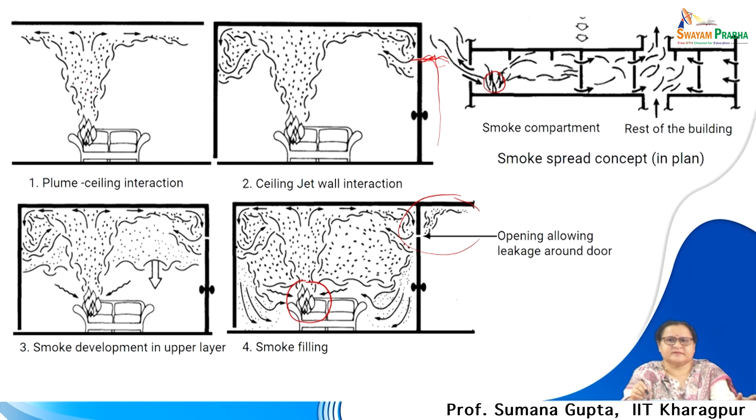So, till the door is closed, the leakage will be there, but gradually if there is an opening, it will come out. So, in this picture you can see the leakage has happened and gradually the smoke is coming out of the room or the enclosure where the fire has happened, though the fire is remaining there. Now, let us see some plans.

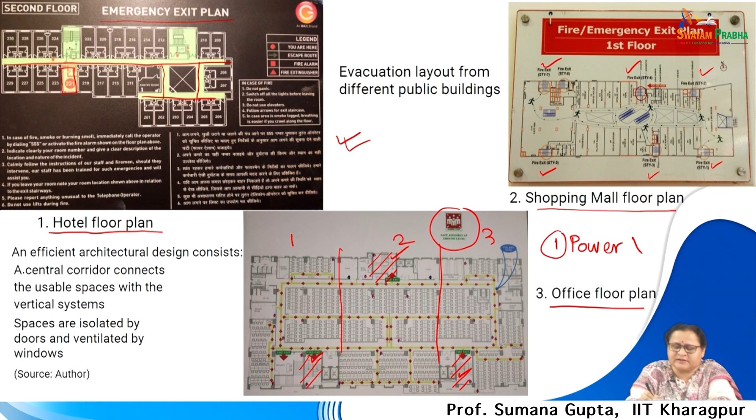So, again comes the point, if these common areas, the passages or the corridors through which the people will be rushing out, are full of smoke, people cannot carry out their movement. Remember the 2 points. In case of fire, the power is switched off, and with smoke visibility reduces, that is called obscuration.

So, we need to manage the smoke because it lacks visibility. Because of smoke the visibility is lost; because of smoke and fire all electrical points are extinguished. So, it is only the emergency lights giving you a direction, and the smoke can even lead to lesser visibility and you may not be able to see.

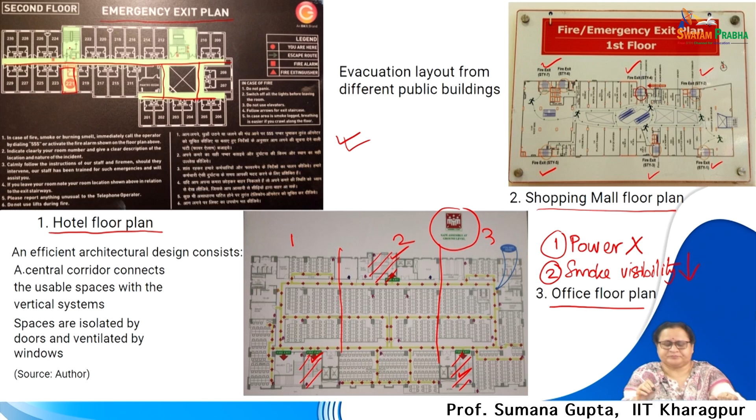So, that is why all the corridors which I have shown in the previous slide have to be kept smoke free. All the staircases which are marked as fire staircases have to be smoke free. How to do that? Now, let us look into a few more points before we move to the management of the smoke part. Obscuration, which is lack of visibility, and it is told that with distance it is actually exponentially reducing, that means at a logarithmic scale it is reducing.

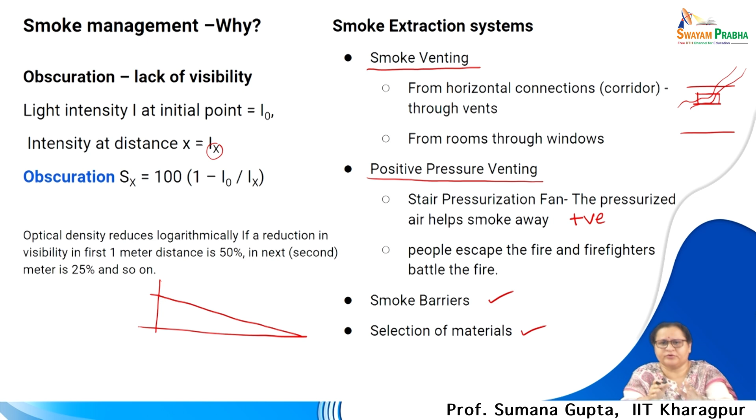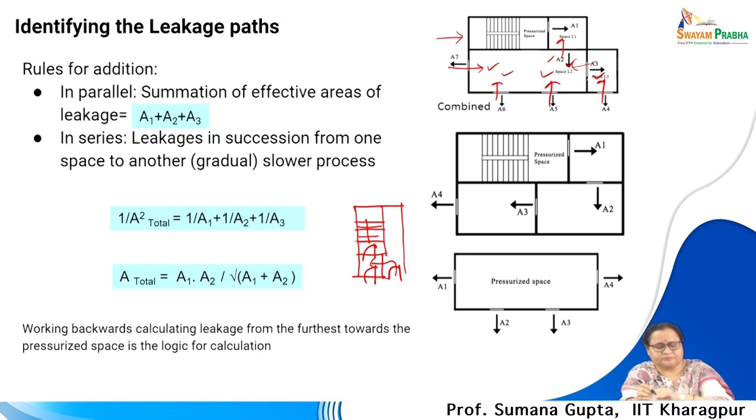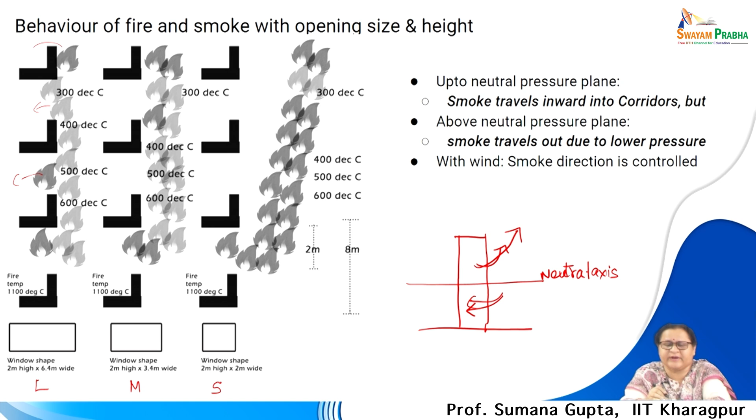So, this is the neutral axis. So, there are heights, the neutral axis, beyond which the pressure outside is lower. As you know, the higher you go, the pressure reduces. So, inside the building there is a different pressure than the outside. Outside is low pressure, so inside air or smoke will go out. Below the neutral axis, the air pressure outside is almost equal, and with the wind direction it will try to get in. So, wind direction controls below the neutral axis; above the neutral axis it is the smoke going outside the building. These kinds of phenomena are very important in case of high rise structures, and the behavior or taming of the smoke as well as the fire becomes important when the fire is at higher floor levels.

We gradually come to the concept of pressurization. Those were the opening sizes, height variation, movement of the smoke direction, but now we want to tame the smoke, control the smoke, contain the smoke in some area and not pollute the passages which are meant for escape. Pressurization is the process which was developed in the 1960s, and gradually it came into buildings, particularly high rise stair enclosures. It is a popular option for protecting the staircases, because the staircase is the only path which remains active for the movement of people. It is not a very difficult thing, but the system has to be operational whenever there is a fire. So, whenever there is a fire, suspecting that the smoke will gradually come out into the building parts, the pressurization system has to be initiated. That is the only part.

Now, it prevents smoke leakage through closed doors into the staircase by injecting clean air into the stair enclosure, so that the pressure in the stair lobby is greater than the adjacent fire compartment. So, a flow of air is continuously maintained to oppose the smoke entering into the staircase or the corridor. Occupants who are most at risk, that is at the fire floor, are evacuated first. Then it is phased from where the fire has happened. The top people are rescued first, and people at the lower levels come out gradually. The lobbies and the fire lift courts also should be pressurized to limit the smoke spread and ensure that the lift is available at all times. If it is a high rise or tall building, as I told, there is a mandate for the fire lift already. So, these lobbies and fire lifts should all be

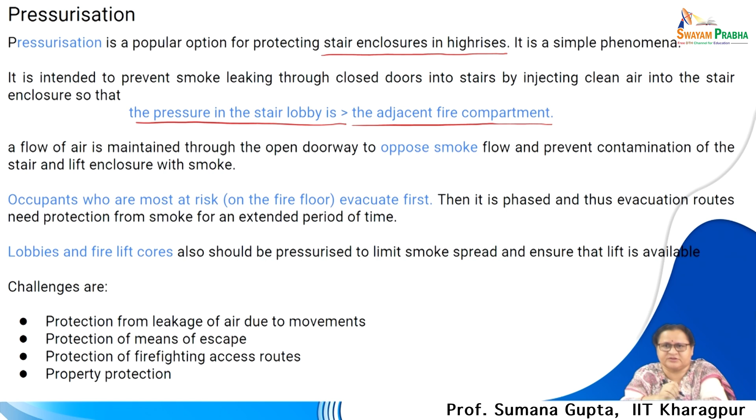under pressurization. The challenges are protection from leakage of air due to movements, because whenever people are coming out of the building or taking the staircase, they are always opening the doors, A1, A2 or A3, the openings which we discussed two slides before. So, the protection from leakage has to be ensured. Protection of means of escape is to be ensured. Protection of firefighting access routes is to be ensured. Property protection is to be ensured by the process of pressurization. We will try to see this in a representative drawing; I will show you in some time.

So, this becomes a standard feature of high rise building codes. Pressurization has to be there, and there are two kinds of pressurization. One is when the system starts when there is a fire alarm. The other is you continuously provide a positive pressure in the corridors and in the stairwells which are marked as fire staircases.

But yes, there is a loss of energy continuously if it is kept on positive pressure. You have to continuously have a fan to maintain that pressure inside that entire staircase shaft. So, that brings in cost efficiency of a building, but pressurization usually starts when there is a fire alarm, and the pressurization happens. So, that is a one stage pressurization, that in case of fire the switch is operated,

but in 2 stage pressurization there is always a very low positive pressure. With the alarm set, it further increases by additional power. The building enclosures, the fire enclosures and the corridor enclosures are further protected.

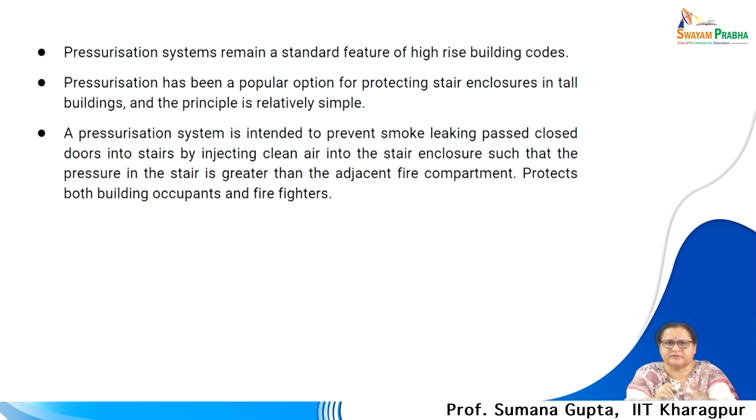Now, let us see the major objectives to evacuate the people from the building through the routes free of smoke. As I mentioned just now, 1 stage pressurization, 2 stage pressurization. 1 stage is only when required during emergency, 2 stage is continuously a positive pressure is maintained inside, and during emergency further air pressure is increased, and it is usually 50 Newton per meter square.

How is pressurization happening? How is this integrity maintained? So, air supply to the designated closed area, that is staircase or the lift lobby or the lock lobby, has to be ensured. The air supply will be only to that area. Large fans are required for fresh air to enter into that stairwell and also into the corridors or the portions of the corridors. Leakage of air through gaps and during escape operation has to be considered during calculation.

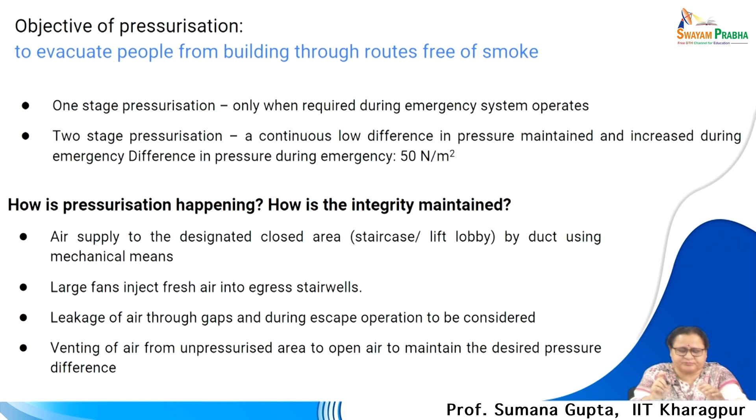However, during the pressure calculation, care should be taken for proper gasketing or closing the edges. Venting of the air from unpressurized area to open air to maintain the desired pressure difference is also to be ensured. So, we will try to see this through this picture. I think as architects, this visual will help you very much to get the feel of what I actually mean. Now, if you see, this is the staircase or the lobby.

If you see this entire block, I mean this portion is the building portion, this portion is the section. So, this is a section where you can see 1, 2, 3, 4, 5, 6, 7, 8, 9 floors, of which on the 7th floor there is a case of fire. And this is the staircase part, and this is the lobby part. This is the lobby part, this is the staircase part. As you can see, the staircase is coming down.

Here these are the pressure meters in pascals. You can see here is one pressure meter, here is another pressure meter. Now, here you see this is a small fan, exhaust fan, whose enlarged picture is here. So, this is the moment there is an alarm raised. Here there is a red box where there is an alarm which is raised because of fire in this particular floor, and you can see the fire may be at some corner, but the smoke is coming out.

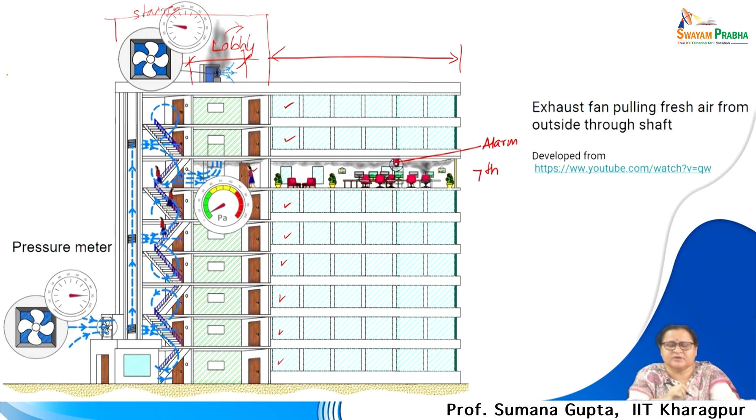So, with this understanding, I take into account that you have understood the method of pressurization. So, as architects we have to be aware: if it is a high rise building, a large scale building, or an institutional building, we have to take support of these pressurization fans and the venting operation in the designated areas, which may be fire escape staircases, and we have to provide a safe escape mechanism. With this we move to another small part of smoke, which is the

double skin wall. In case of high rises, sometimes for energy conscious buildings we have double skin walls, and it may so happen that you have these as your floor plans and the smoke is trying to come out, but it cannot break the second wall. That means there is one opening here, the smoke could leak, but there is another wall. So, this is the external facade, this is the internal facade or the inner skin. So, the smoke is entering into this part.

Now, this can happen in double glazed walls, double glazed windows, and it can create tremendous pressure inside the cavity, which may lead to breakage, and as hot smoke moves towards the outer skin, the outer glass panel might get cracked. So, if this hot air creates pressure on this external facade, this may get cracked. If it is not creating pressure, it may move up, and because it is a chamber or a shaft, along with smoke, the fire can also move up.

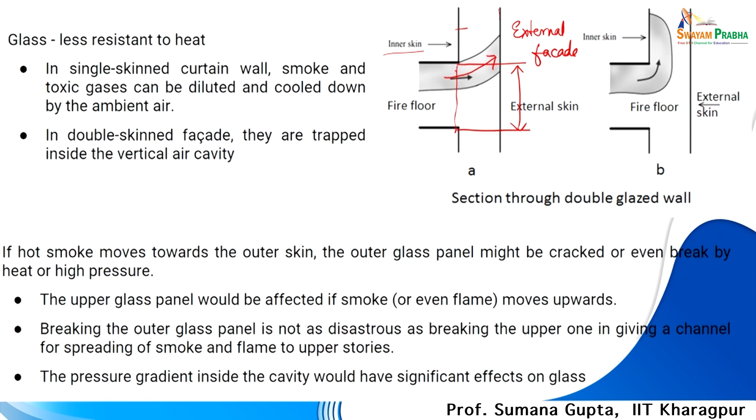So, one has to be very cautious whenever such kind of double glazing is used in a building. The closure, that means the sealing of the openings, has to be very much airtight, so that no smoke, no fire can escape, and the materials are also to be resistant to fire.

Lastly, I would like to close this lecture with this important slide, which is smoke curtain. Nowadays, in modern buildings you will see smoke curtains. You can see this is the curtain, which is dropping automatically on sensing smoke. So, on sensing smoke, just exactly like a rolling shutter, it is held on the top of a mounting roller. Above the false ceiling, there is a roller containing the smoke curtain, and the smoke curtain drops gradually to hold the smoke within one compartment and not allow it to move to another part of a building.

So, what is it doing? It is like a curtain dropping on sensing that there is a case of fire, that is, there is smoke sensed by the sensor, and it is gradually closing the path, so that the smoke cannot move from one space to the other. You can see here it is hidden neatly above the ceiling line. So, above the false ceiling the curtain is there, and it is pulled down.

Similarly, here in this picture it demonstrates that these are the two lifts, and because the lift shaft can get smoke inside it through the small gaps, these are also protected by smoke curtain, indicating that people cannot escape through that route because lifts get closed down, and these are the smoke curtains which are preventing the smoke from infiltrating inside the lift lobby, lift blocks also.

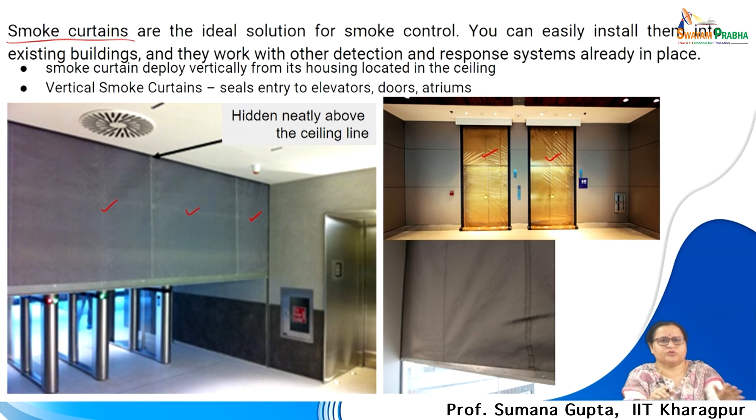So, with this I think we will end this particular topic, movement of smoke, and we will move to the next module in the next class.